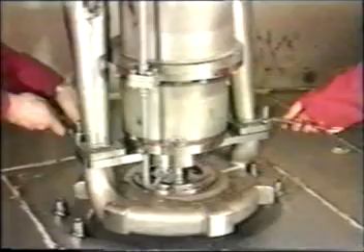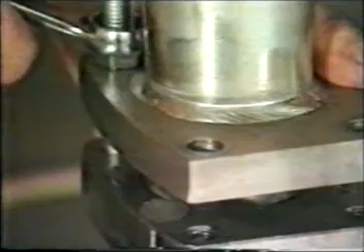Hanging in the lowering lifting bolts, diagonally positioned on each cargo leg. Lower the whole unit down carefully, turning the lowering lifting bolts in parallel.

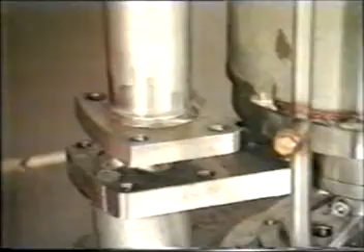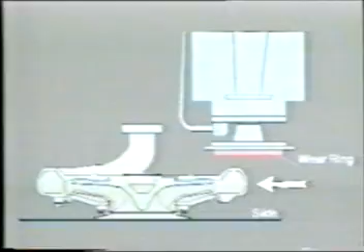Slide the unit out of the well. To avoid damage on the coating, use plastic strips when sliding out the unit.

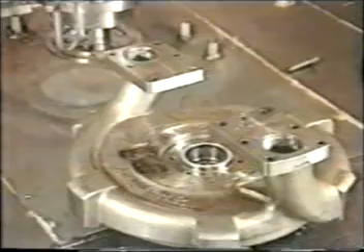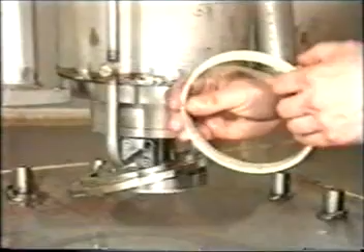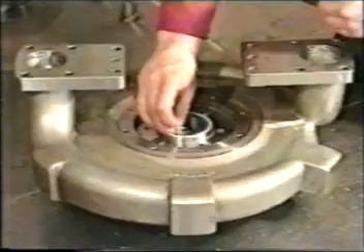Remove the upper wear ring and inspect it carefully. Before turning the unit upside down, remove the O-ring and seal element for the ceramic sleeve.

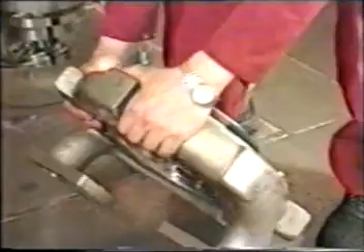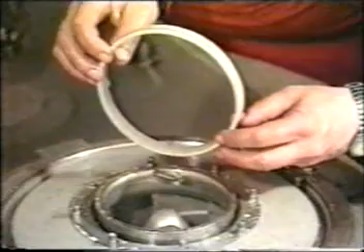The suction cover and the impeller can now be dismantled and the parts can be inspected. Pay special attention to the wear rings. Normal radial clearances when new are 0.3 millimeter, and we recommend changing the wear ring if the radial clearance is more than 1.5 millimeter.

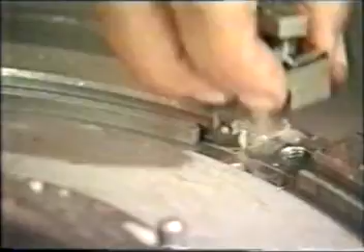Loosen the locking bracket and remove the locking ring. Use the suction bell mouth to lift out the suction cover. And finally, lift up the pump impeller.

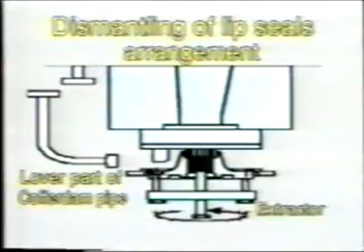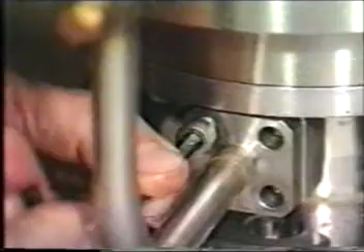Dismantling of lip seals and ceramic sleeve. Dismantle the lower part of the cofferdam pipe first. Change of wear rings, double cargo seal, and cofferdam seal. This can be done without draining the cargo pump's hydraulic section.

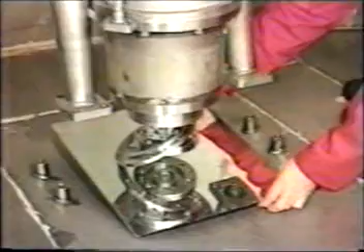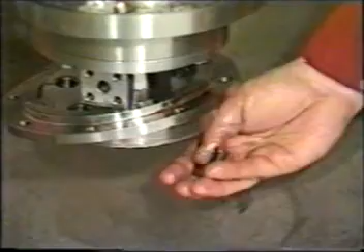For demonstration, we are using a mirror showing how to loosen the washer, remove the bolt and impeller hub. The impeller hub is pulled out by using the extractor from the Framo toolbox.

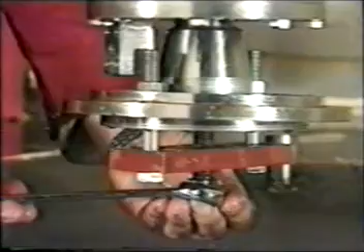Changing of wear rings and cargo seals is a service job normally done by the crew on board. How frequently depends primarily on the type of cargo. Some ships discharging cargo with a lot of sediment may have to do this job several times per year, while others carrying only clean oil products may run for 5 to 10 years before doing any service work on the cargo pump.

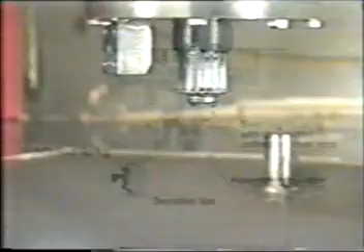Install the assembling cylinder to keep the ceramic sleeve in place and to protect the sensitive lips on the lip seals.

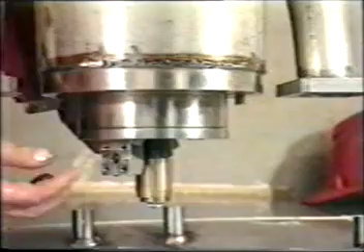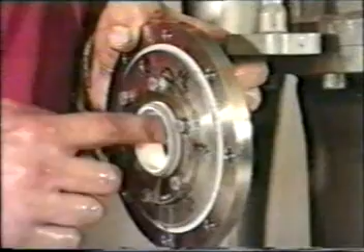Pull down the seal ring housing with the cargo seal. Dismantle the seal element and then the cargo seal. Inspect the parts and change if necessary.

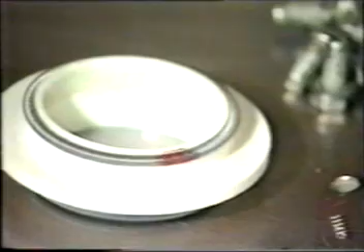When assembling the parts, remember that the spring marked red on the double cargo lip seal is facing into the cofferdam.

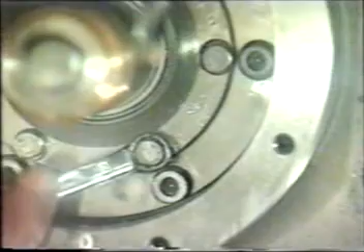If necessary, the Framo single cargo seal may be dismantled. Take away the assembling cylinder and pull out the ceramic sleeve, and check the parts carefully.

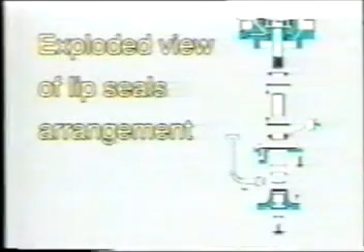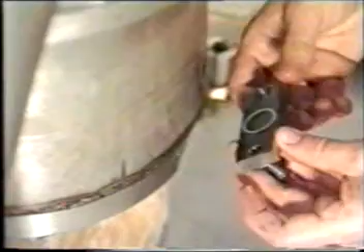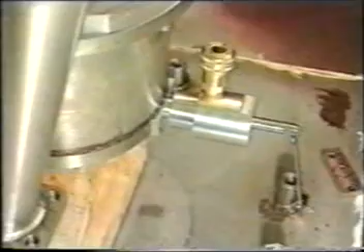Draining of the pump. If further dismantling is necessary, we have to drain the hydraulic oil from the pump stack. To avoid oil spill, we can use a drain tool and an air-driven drain pump from the Framo toolbox and pump the oil to a storage tank. Before pumping, open the air venting plug on the speed torque control valve on deck.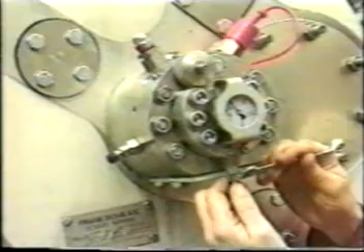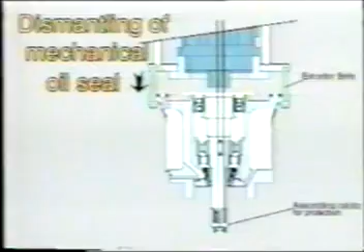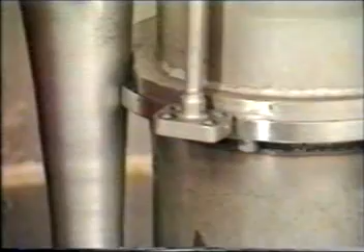Dismantling of the mechanical oil seal. The easiest way to dismantle the mechanical seal is first to remove the bearing housing from the pump casing. Use 2 extractor bolts, M10, for lowering the bearing housing unit.

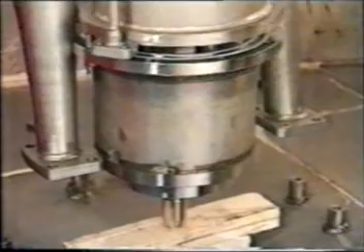Loosen the rest of the bolts and lower the unit parallel down. Use a piece of wood to protect parts and the coating in the pump well, and also the assembling cylinder on the pump shaft to protect the spline.

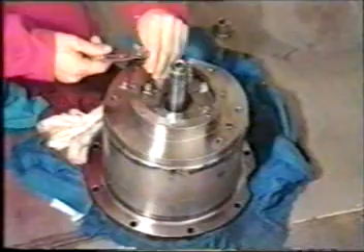Turn the unit upside down. Remove the upper seal ring housing and then the stationary part of the mechanical seal. Use 2 lifting bolts to take out the mechanical seal.

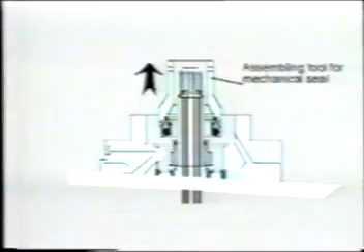Carefully control the seal element. Pull out the rotating part of the mechanical seal by using the assembling tool from the Framo toolbox.

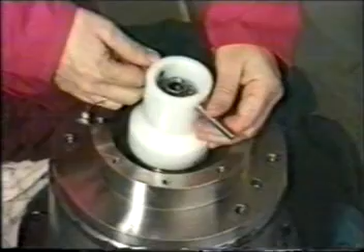Pay special attention when twisting on the tool for lifting out the seal's rotating parts.

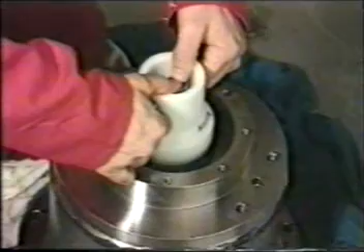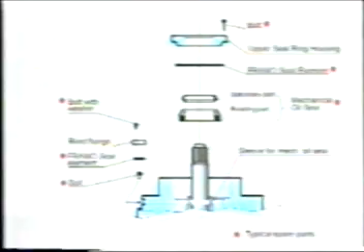Control the seal face carefully. If the seal faces are destroyed, fretting or grooves in the surface, they normally can be reconditioned.

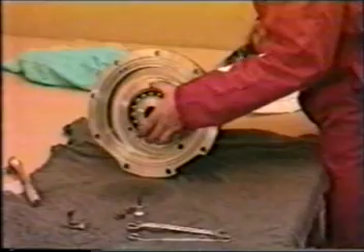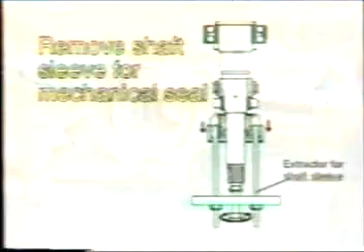Dismantling of pump shaft, ball bearings, and backstop unit. Use a plastic hammer to pull out the shaft, ball bearing, rotating part of the backstop unit, and roller bearing. If necessary, remove the shaft sleeve for the mechanical seal by using the special extractor from the Framo toolbox.

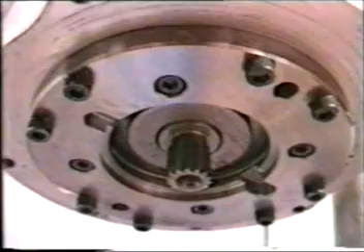Dismantling of the hydraulic motor. The only part left now is the hydraulic motor. For dismantling the motor, install the jack from the Framo toolbox.

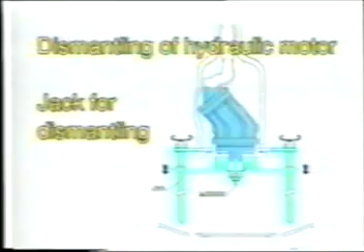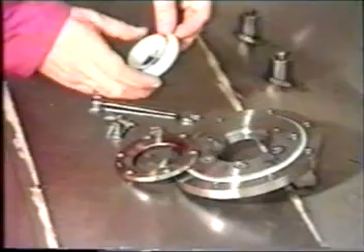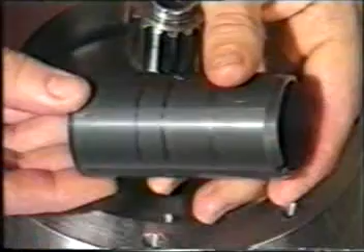Before assembling, check all seal elements, seal grooves, and seal faces carefully. Pay special attention to the Teflon rings and be absolutely sure of no deformation. Never install a damaged O-ring, and be sure of no corrosion, cracks, dirt, etc. And remember, use only genuine spare parts.

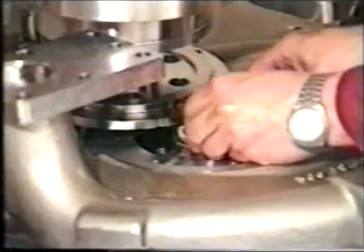All assembling has to be done in reverse order, according to the dismantling procedure. Follow the instructions in the Framo Service Manual closely.

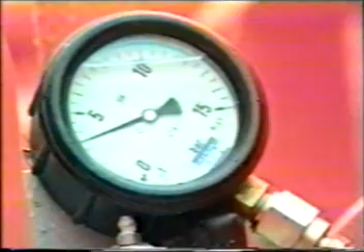Pressure test the cofferdam, test run the cargo pump, and check that everything is okay before a new cargo is taken into the cargo tank.

By following these instructions, you will achieve a long-lasting, well-functioning cargo pumping system and a happy ship for the crew members as well as for the owner.